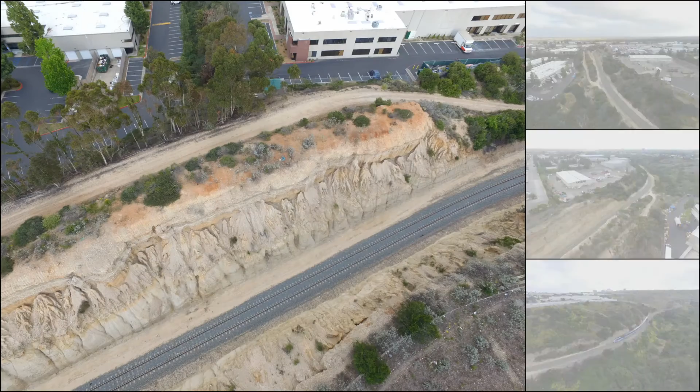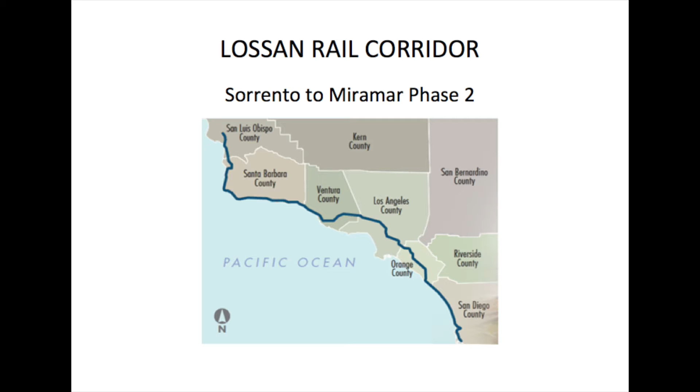This is the LOSSAN Rail Corridor, a 351-mile coastal rail corridor that begins in San Luis Obispo and ends right here in San Diego. This corridor is the second busiest U.S. passenger corridor. The Sorrento to Miramar Phase 2 project proposes to straighten out the worst curves in the LOSSAN Rail Corridor on the steepest grades in Soledad Canyon, right here in San Diego County.

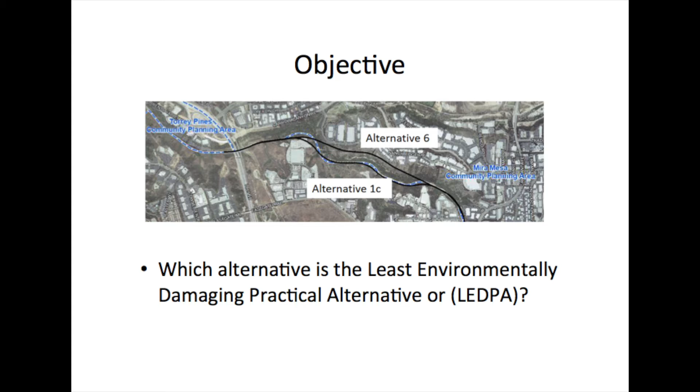The alternatives analysis has recommended that 2 alignments be carried forward to the environmental document, Alternative 1C and Alternative 6. We have to decide which is the least environmentally damaging practicable alternative, or LEDPA.

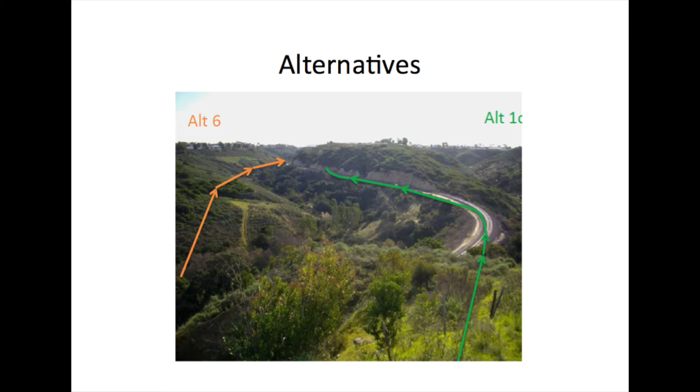Alternative 1C is mostly within the existing railroad right-of-way along the south side of Soledad Canyon. Alternative 6 traverses a new right-of-way corridor along the north side of Soledad Canyon and includes 2 new railroad bridges. According to the existing alignment chart provided by SANDAG, the existing speed is 25 miles per hour along the existing track, while freight makes the speed 20 miles per hour.

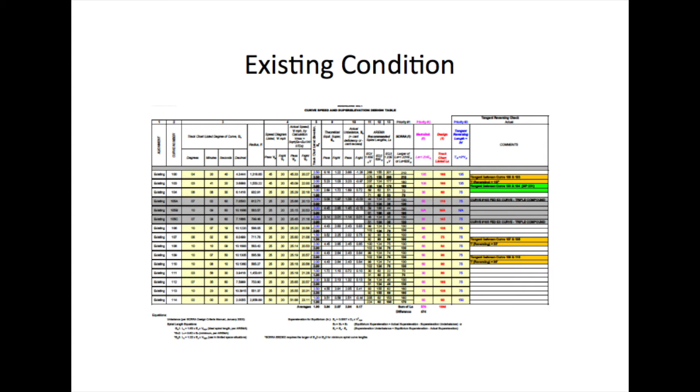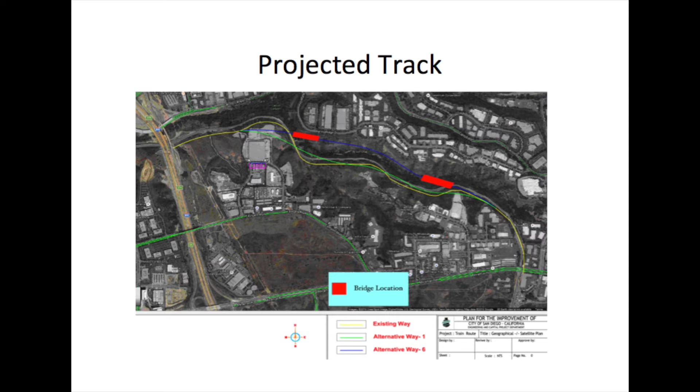Here is the projected track alignment for both Alternatives 1C and 6, including the location of the bridges. The phrase right-of-way refers to describing the ownership of such property.

For both alignment 1C and alignment 6, the parking lot of FedEx needs to be acquired for the construction of either track alignment. Using ArcGIS, the projected right-of-way acquisition from FedEx is 7 acres of land for Alternative 1C, while the construction of Alternative 6 will require 15.4 acres of land.

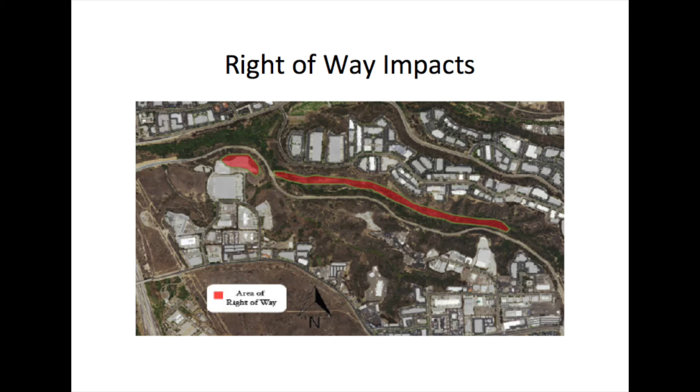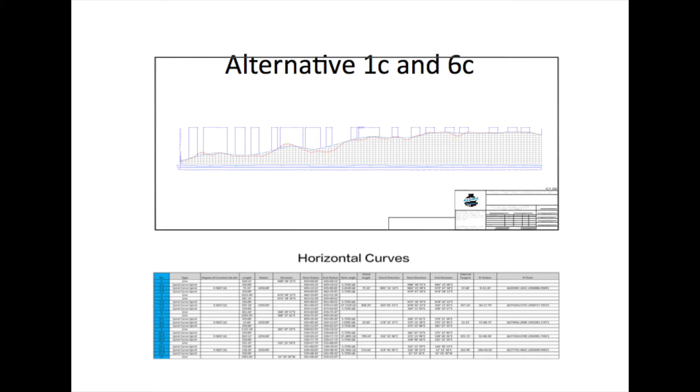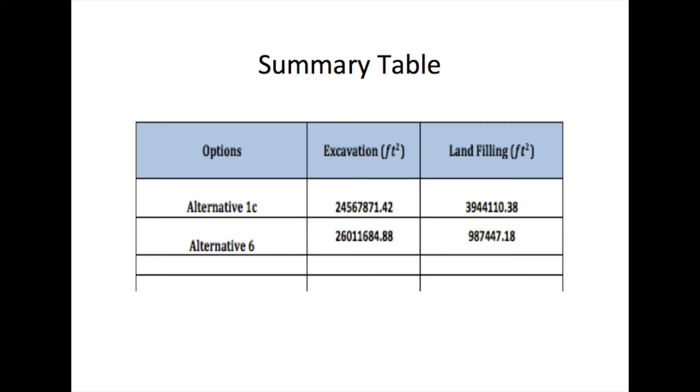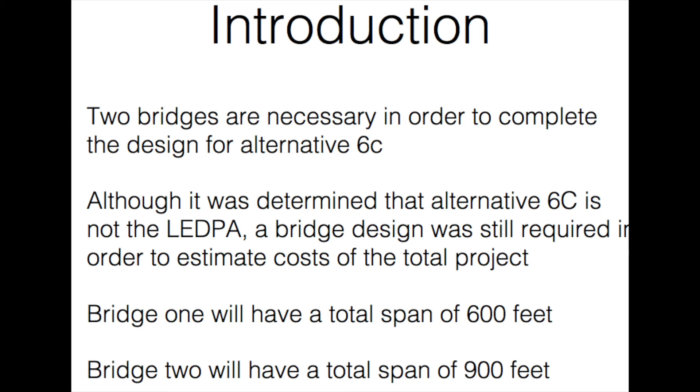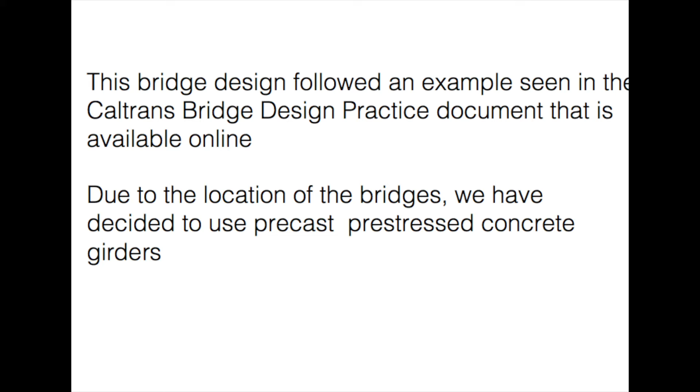This bridge design followed an example seen in the Caltrans Bridge Design Practice document, available online. Due to the location of the bridges, we decided to use precast pre-stressed concrete girders. Due to the length and width requirements, we selected the California Standard Bulb T girder CA-BT67.

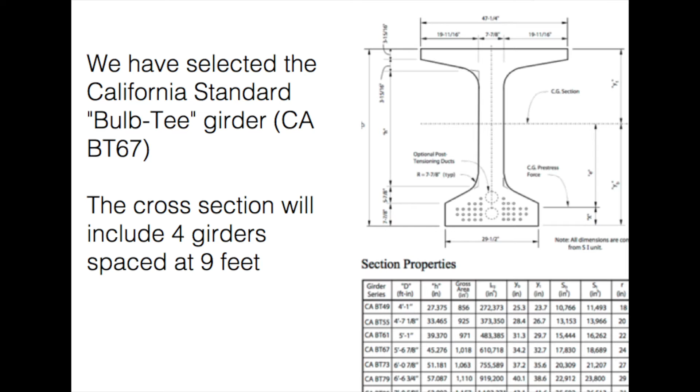The cross sections include 4 girders spaced every 9 feet across a 900-foot span. Loading of the bridge will follow AREMA standards as well as SANDAG standards. Although extremely important in real-life design, seismic effects were not considered in this design due to extreme time constraints and the complexity of seismic analysis.

Since it was determined that Alternative 6 was not the least environmentally damaging and was the most expensive, the bridges were not presented in the selected design.

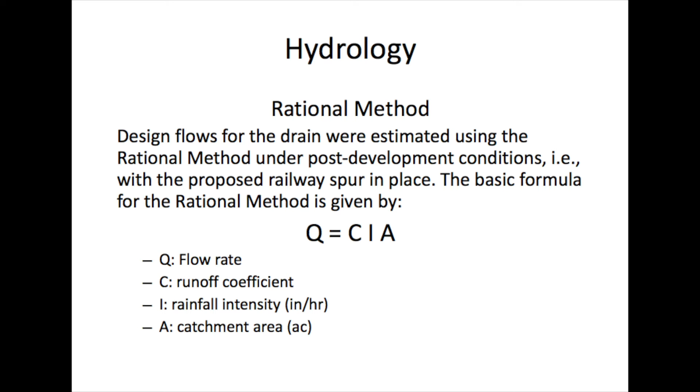The hydrology study calculates how much water lands in a given area. To find the flow rate of the water, the rational method is used: Q equals CIA, where Q is the flow rate, C is the runoff coefficient, I is the rainfall intensity, and A is the catchment area. The value of the runoff coefficient will depend on the description and grade of the area.

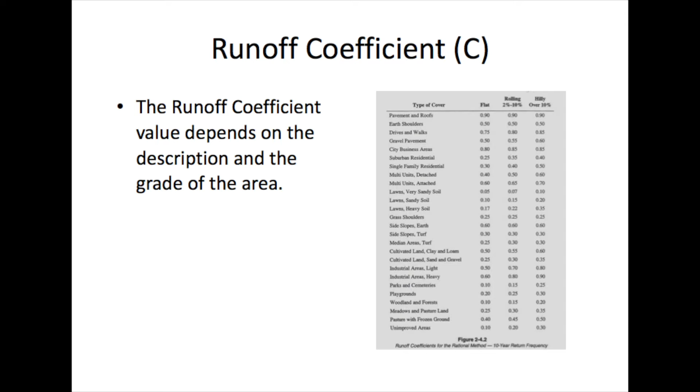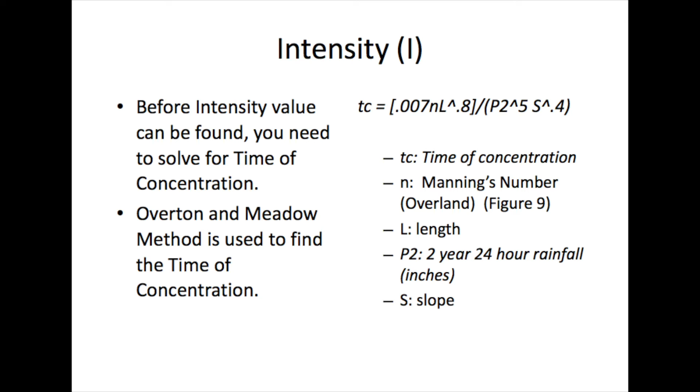Match it with the given table to find a value. In order to find intensity, you will need to solve for time of concentration. The Overton-Meadow method is used to find the time of concentration. After finding time of concentration, you can find the intensity value through the IDF curve.

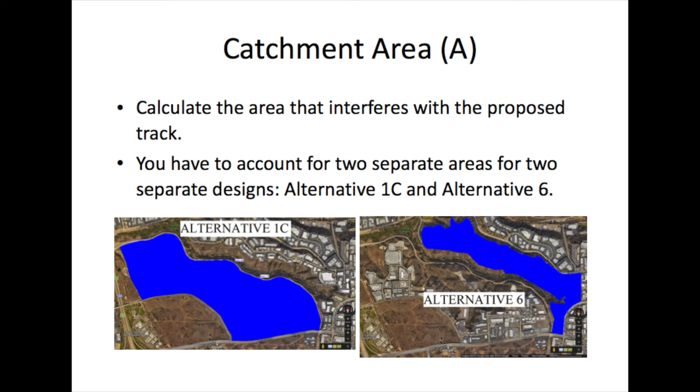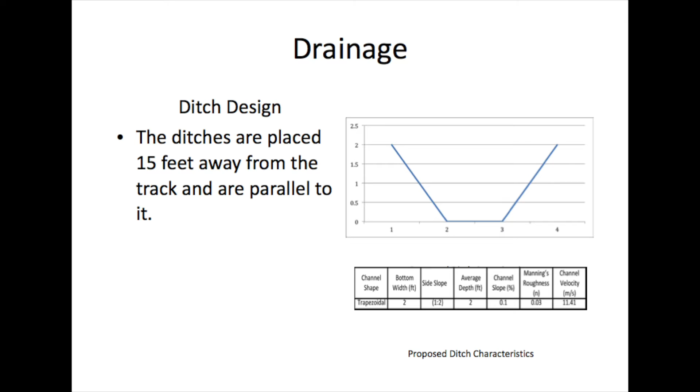To find the catchment area, two calculations were made, one for Alternative 1C and another for Alternative 6. These are the rational method results that will determine the size of the culverts. The drainage design will safely move rainwater away from the tracks. The ditches will be parallel to the tracks and 15 feet away from it. The diameter of the culverts will vary depending on the calculated flow rate. The culverts will move rainwater from under the tracks to prevent erosion.

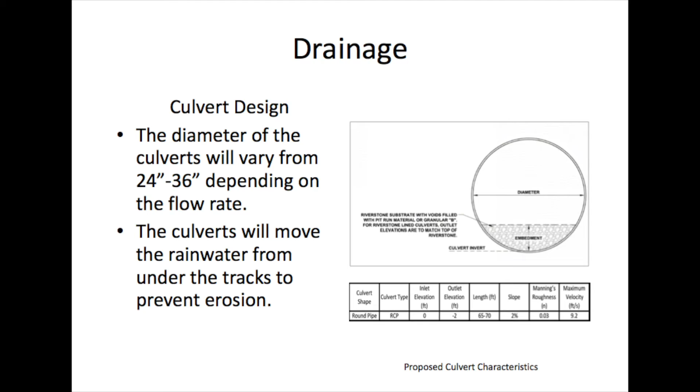The purpose of this study was to evaluate the existing conditions and develop recommendations for site preparation and appropriate foundation systems for the planned alignments and structures.

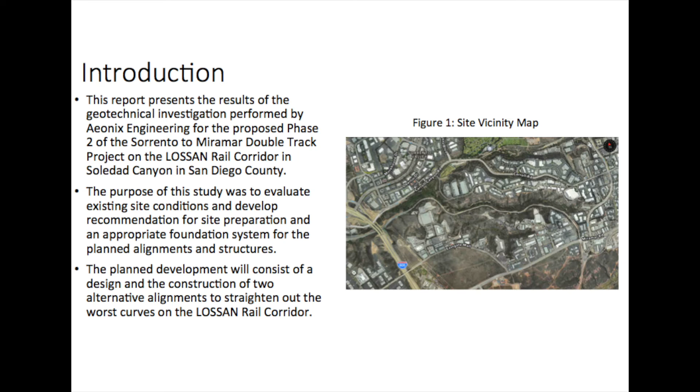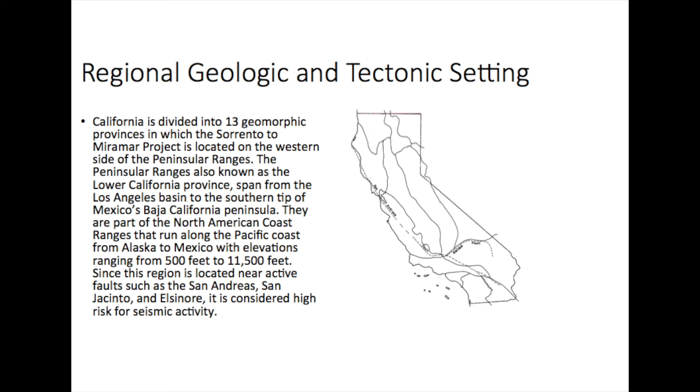When researching the regional geologic and tectonic setting, it was discovered that California is divided into 13 geomorphic provinces, in which the Sorrento to Miramar project is located on the western side of the peninsular ranges. These ranges are also known as the Lower California Province, spanning from the Los Angeles Basin to the southern tip of Mexico's Baja California Peninsula.

The formations that were encountered at the site include artificial fill, colluvium and alluvium, Lindavista Formation, Stadium Conglomerate, Scripps Formation, and Ardath Shale.

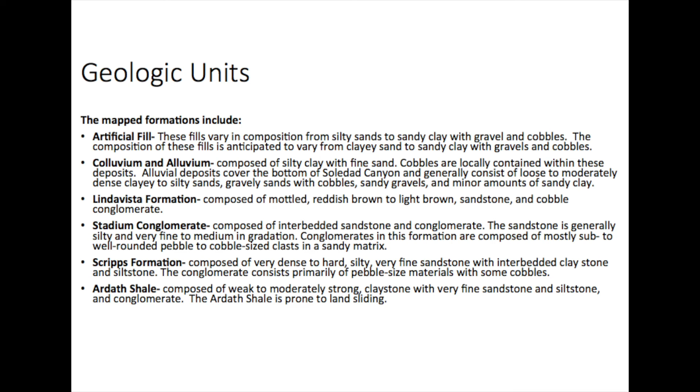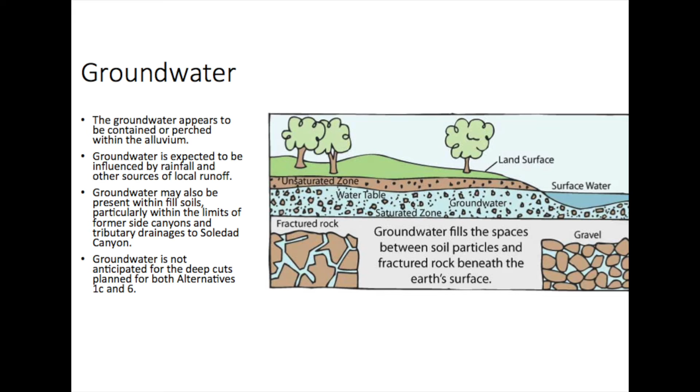Groundwater appears to be contained or perched within the alluvium and is expected to be influenced by rainfall and other sources of local runoff. It may also be present within fill soils, particularly within the limits of former side canyons and tributary drainages to Soledad Canyon. Groundwater is not anticipated for the deep cuts planned for both alternatives 1C and 6.

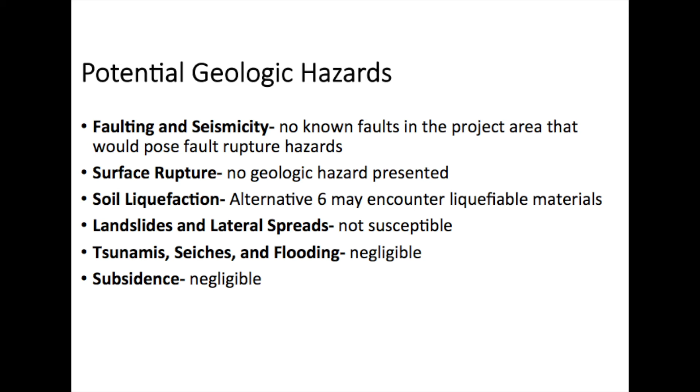Several potential geologic hazards were considered in this project, including faulting and seismicity, surface rupture, soil liquefaction, landslide and lateral spreads, tsunamis, seiches, flooding, and subsidence. Out of all of these, the only one that was a factor was soil liquefaction in alternative 6.

Earthwork at the site will generally consist of embankment fill placement, backfill of retaining structures, cuts to expand or create the rail bed, and preparation of the rail subgrade.

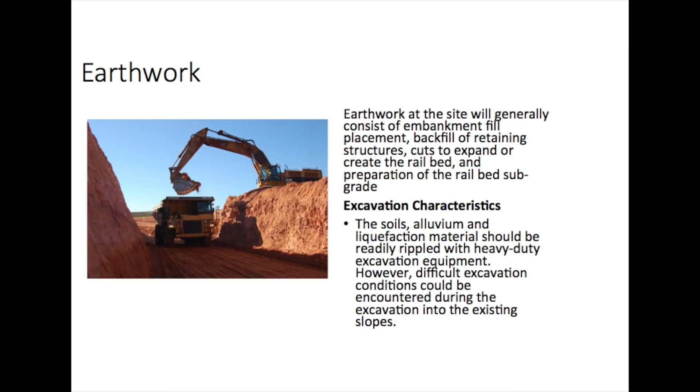Excavation characteristics: the soils, alluvium and liquefaction material should be readily rippled with heavy-duty excavation equipment. However, difficult excavation conditions could be encountered during excavation into the existing slopes.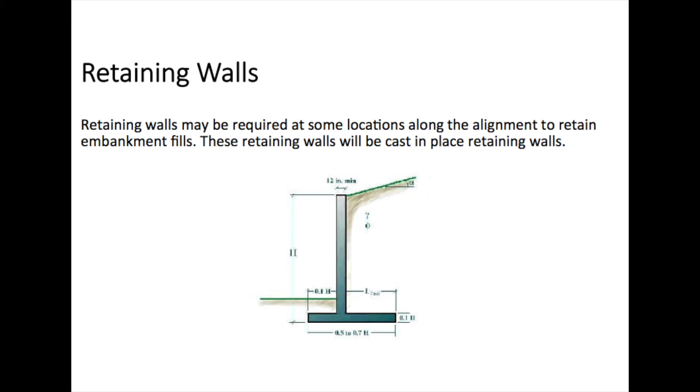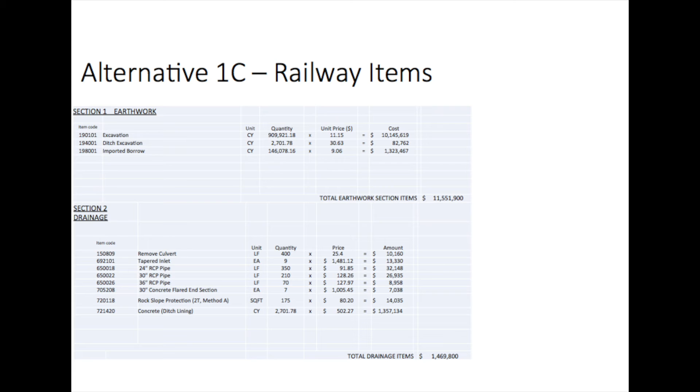The cost estimate for Alternative 1C included 3 sections: railway items, structural items, and right-of-way costs. Railway items included earthwork, drainage, environmental, track, and contingency. Structural items included 4 retaining walls.

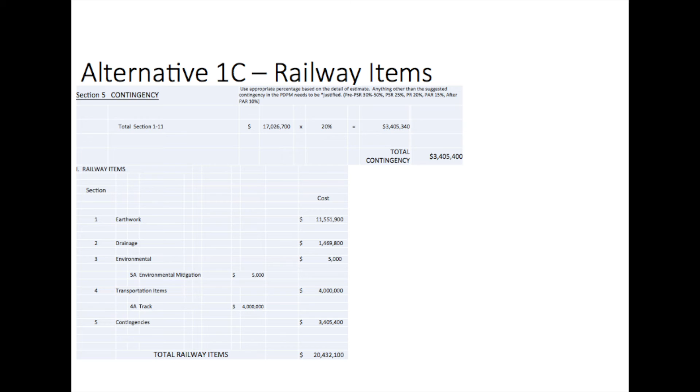The total cost of the retaining walls was around $658,000. The total right-of-way cost was nearly $16 million, making the total of Alternative 1C $36,772,165.

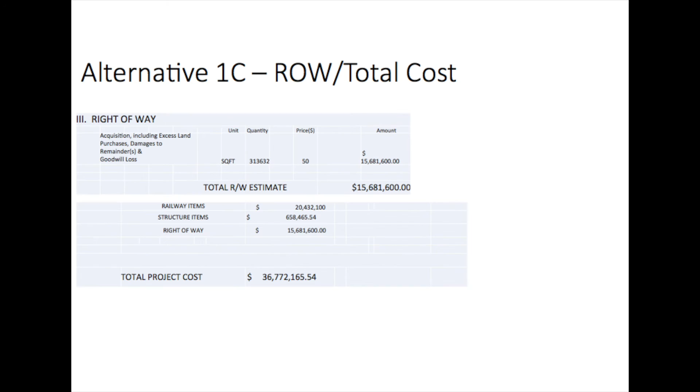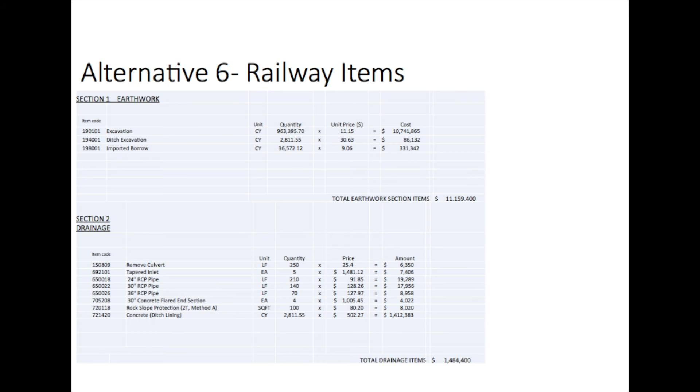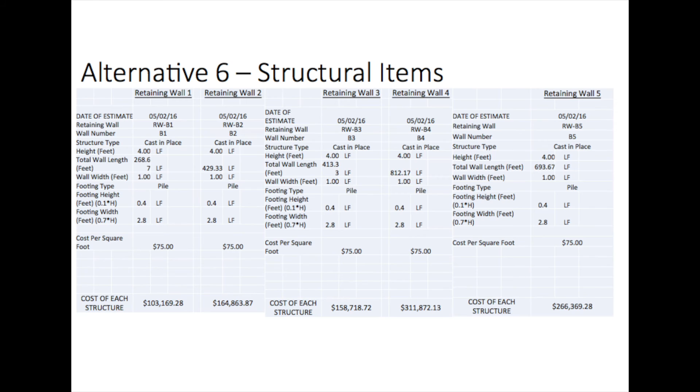The cost estimate for Alternative 6 also included railway items, structural items, and right-of-way costs. Railway items included earthwork, drainage, environmental, track, and contingency. The structural items included 5 retaining walls along the alignment and 2 bridges.

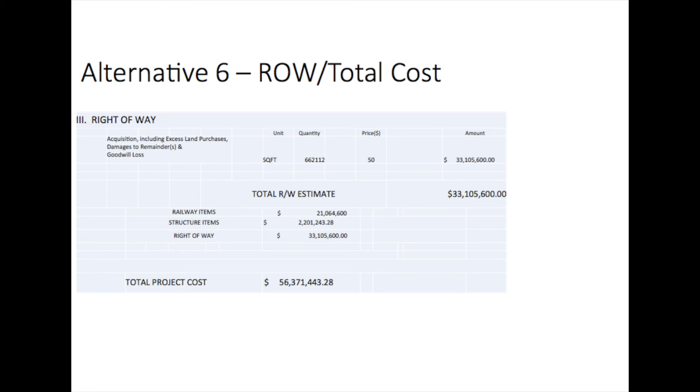The total cost of Alternative 6 came out to be nearly $56 million.

What is LEDPA and why consider it? LEDPA is an acronym that stands for Least Environmentally Damaging Practicable Alternative. When considering a project's alternatives, it is important to weigh environmental impacts in addition to the cost.

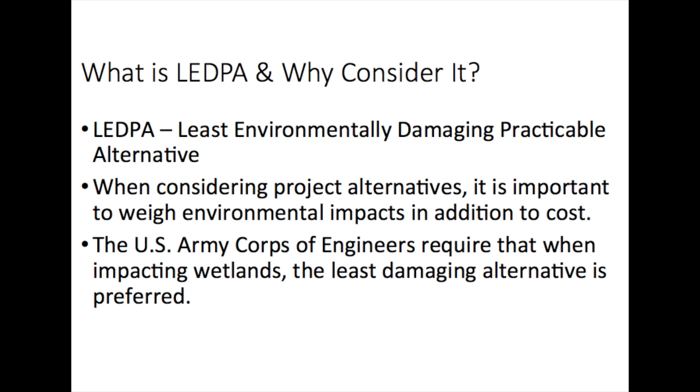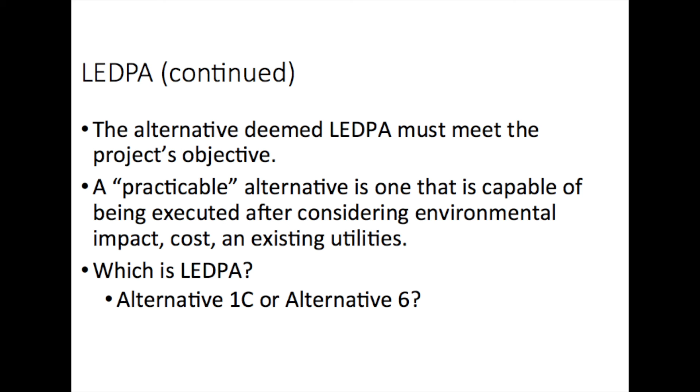The U.S. Army Corps of Engineers requires that when impacting wetlands, the least damaging alternative is preferred. The alternative deemed LEDPA must meet the project's objective. A practicable alternative is one that is capable of being executed after considering environmental impact, cost, and existing utilities.

Additional considerations include Section 4(f) of the Department of Transportation Act of 1966, CEQA, the California Environmental Quality Act, and NEPA, the National Environmental Policy Act.

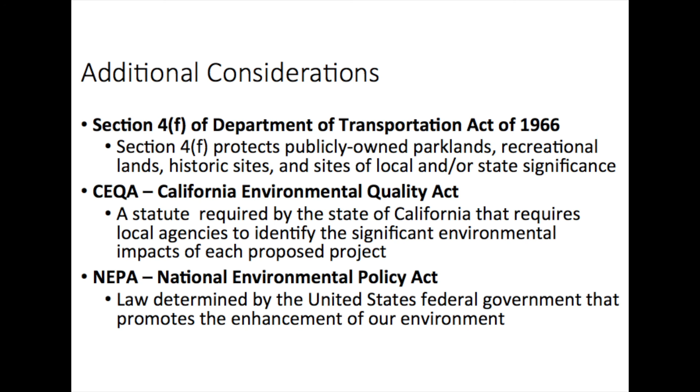Threatened species existing in Soledad Canyon include the California coastal gnatcatcher and the San Diego fairy shrimp. When considering design alternatives in the canyon, it was vital to ensure that these species were not harmed.

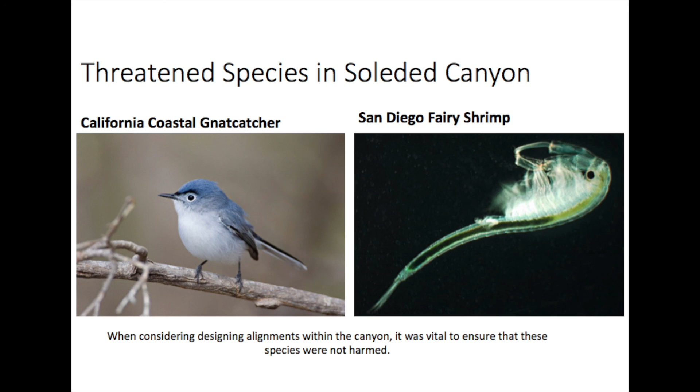Our final decision was to deem Alternative 1C the LEDPA. We chose 1C as the LEDPA because it impacts approximately half an acre of the Section 4(f) wetlands, whilst Alternative 6 impacts over 55 acres of the Section 4(f) wetlands.